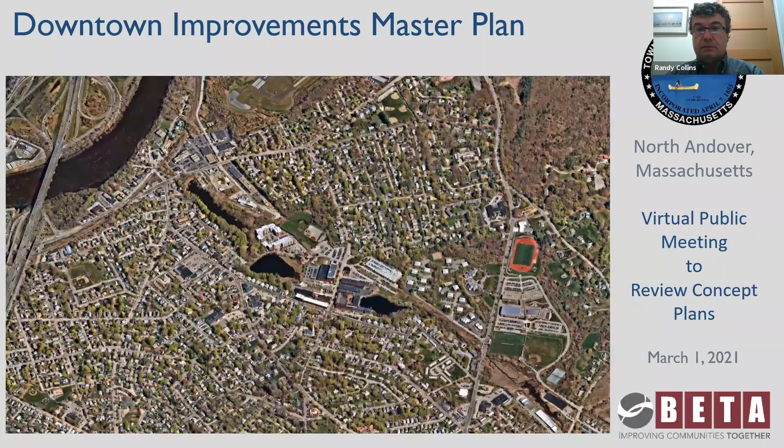So as Gene said, this is the third of the public meetings that we've had for the project. I'd like to go over a few things for tonight. This is being recorded and will be available on the town's project website. The address is on the screen. I'm going to briefly summarize the first two public meetings, and then I'm going to get into a discussion on the preferred concept for the downtown.

As I said, this will include polling questions during the course of the beginning of the presentation. And we'll also give you opportunities to ask questions throughout the presentation using the chat feature.

If you're having any problems with the chat feature, one of the members of the tech team will help you out. Simply just press the chat icon and in the to field, type in tech team and send them a message and they can help you out.

The group, the participants will be muted throughout the presentation. So feel free to make comments that you'd like and we won't hear you. If you want to ask a question, again, use the chat icon for asking those questions.

Jeff's going to moderate the questions as they come in. We probably won't be able to answer every single question, but what Jeff is going to do is look at sort of the trend of the questions and be able to distill them down so that we can answer as wide a variety of questions as possible.

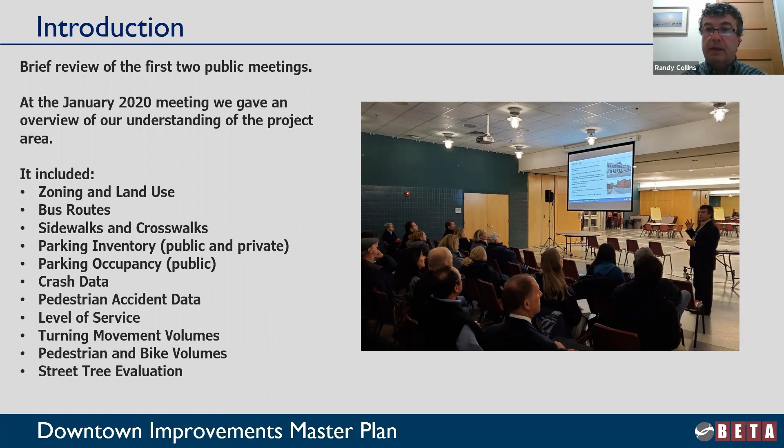The second meeting, back in December, was the first of the virtual meetings. It was a meeting to look at a couple of options that were ideas we generated based on input we received and based on looking at the downtown and coming up with ways to make improvements. One of the things we're trying to accomplish with the project is to generally provide a renewed streetscape for the downtown and also to make better connectivity to the downtown, from the surrounding neighborhoods as well as from the Mills area.

There were two general options presented that focused on the core of the downtown. Parallel parking was one option, angled parking was the other. The way things turned out, people preferred the parallel parking option as opposed to the angled parking option, and that's what we're going to be forwarding through in this presentation.

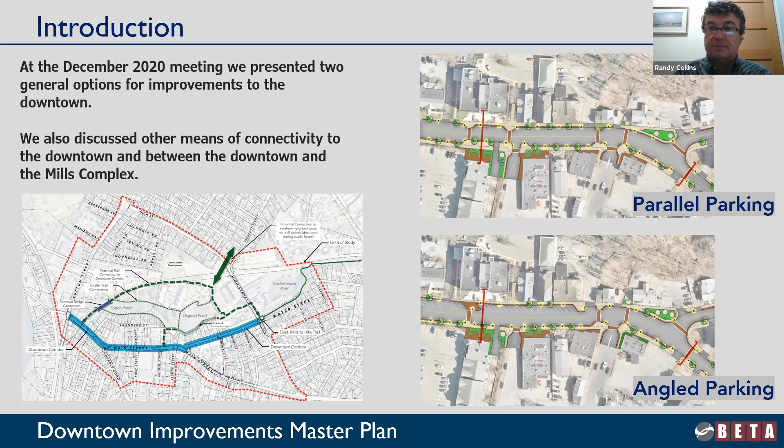So here's our project study area, and here is the concept plan. I'm going to give you an overview of the core area of the downtown. This is the parallel parking concept — basically, when you do an on-street parking count between Waverly and Water, you find there are 54 existing spaces, and this concept results in a loss of 4 spaces, down to 50 spaces. I want to walk you through this in a little more detail as we look at the entire downtown study area.

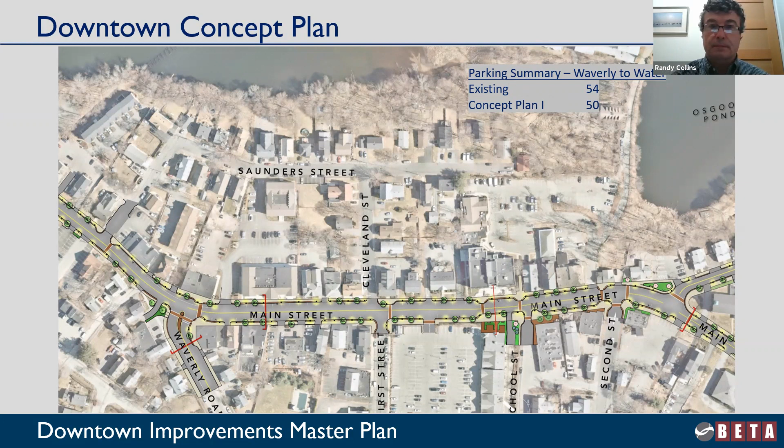So this is right in the core of the downtown at Town Hall. That red line you see going across the roadway is where we're going to show some renderings of what the downtown could look like.

The other thing I want to point out is just a general orientation to the plans, which you can see in the legend. The green circles are generally proposed trees. The yellowish bright areas with a dark spot are ornamental lights. Brick banding was in the sidewalk area, and that's an important point to point out.

We did have some questions at the last meeting about brick sidewalks versus non-brick sidewalks, or having a brick band. It was the preference of the group at that time to have a brick band as opposed to the sidewalks being entirely brick.

There are crosswalks, which you can see on this graphic as well. But the other thing to point out is the existing curb line, shown as a red dashed line. In some areas it's very different from the proposed curb line. So in the area across the street from Town Hall, you can see the red dashed line right at this location showing the existing curb line location.

Take her out—excuse me while we take care of the dog. Sorry about that. Anyways, the beauties of doing virtual public meetings.

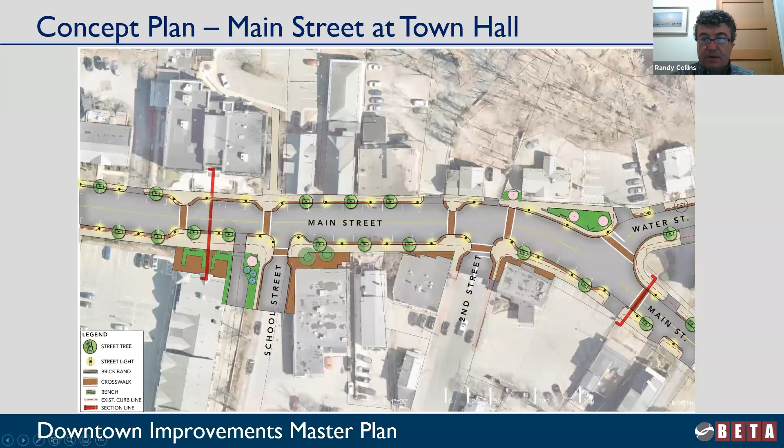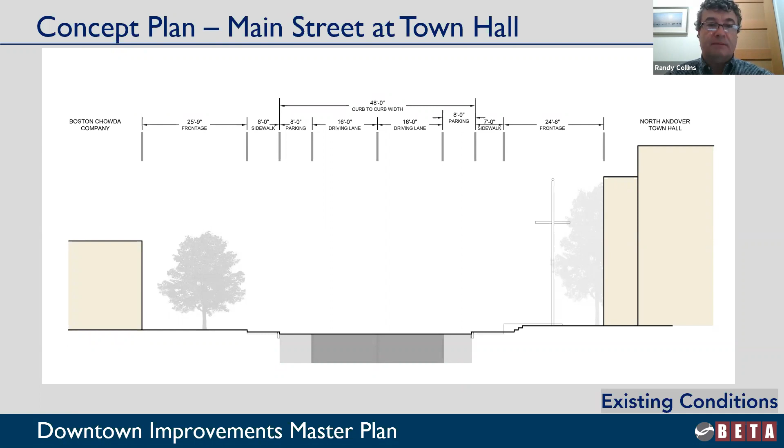This is the cross section of the roadway width in relation to the sidewalk widths currently between Town Hall and Boston Chowda. The roadway width is about 48 feet, with travel lanes about 16 feet and 8-foot parking lanes. Under the proposed condition, at least in this small segment in front of Town Hall, the parallel parking across the street from Town Hall is taken out, and we're able to add into the sidewalk area, making that area about 21 feet with a 7-foot sidewalk, while still maintaining parking on the Town Hall side.

One thing to point out is that the travel lane width goes from 16 feet to 13 feet 6 inches, which for a downtown area is a relatively generous width. This is about the only section of downtown around Town Hall, from about Water heading towards Waverly, where there's a 13-foot-6 travel lane. But the travel lane never gets any narrower than 11 feet, which is a very common travel lane width for downtown areas.

Hey Randy, we have one question come in asking, will the trees be precluded by the utility lines? Well, I'm going to touch on that in just a second.

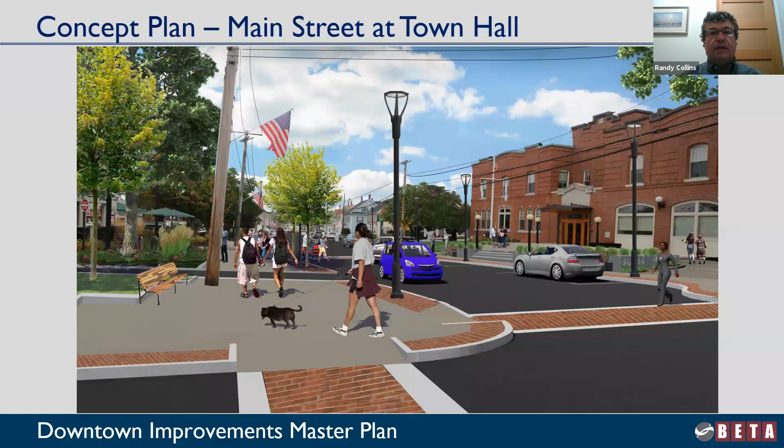I wanted to give you a rendering depicting what we're talking about. This is looking to the north, generally speaking, along Main Street with Town Hall on the right-hand side. Here is the proposed condition. Generally, I would say we would still try to find a way to use street trees even if utilities are there—it just limits the tree selection.

You're going to notice that all of the renderings we'll show tonight depict a with-utility and without-utility condition, and we've always shown the trees within there, whether with utilities or without. They don't really get into whether it's a vase-shaped tree, which you might use with utility lines, versus a more upright or straight central leader tree, which you'd probably lean towards without utilities. So this is an example of what it looks like under the proposed condition.

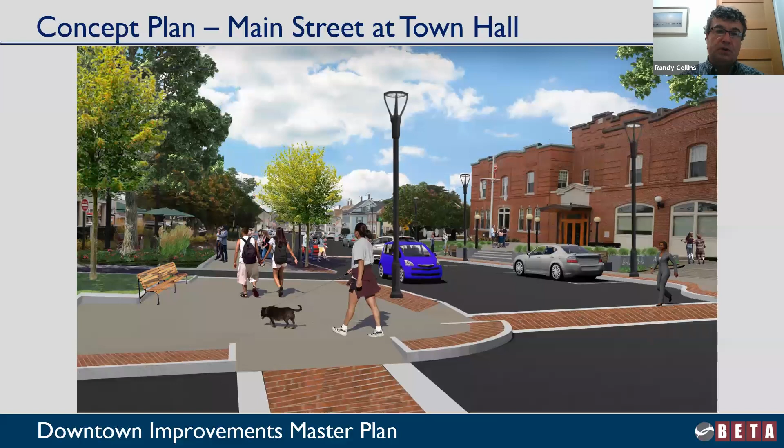And just to give you a reminder, the existing condition, proposed, and proposed without utilities.

Randy, can I ask a couple more questions? Sure. There's one comment and someone says that it looks very good without overhead lines. And the other question is, is there a reason we aren't going to put utilities underground?

There is not a reason. We've been, as part of this process, talking to the town about the utilities, and it's been a subject for all of the public meetings that we've had. I think the way to characterize it currently is that the town is still looking at putting the utilities underground. There's funding issues that go along with it. But anything that we do would be able to, if we build in the right infrastructure, accommodate undergrounding utilities in the future. So what I mean by that is we could put in duct banks and some vaults in the sidewalk during construction of the streetscape that would accommodate the future undergrounding. It's a decision, final decision has yet to be made. And again, this is just a master plan, so we're really talking about preliminary ideas. No matter how the project moves forward, the undergrounding of the utilities needs to walk hand in hand with the streetscape development plans so that the right decisions can be made when it comes time to implement the design.

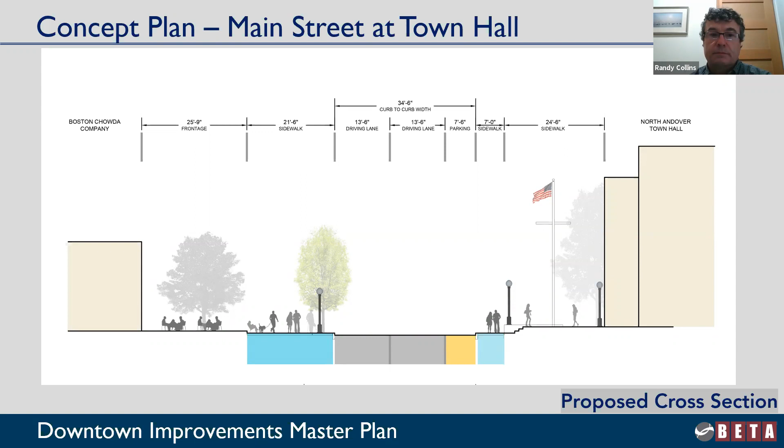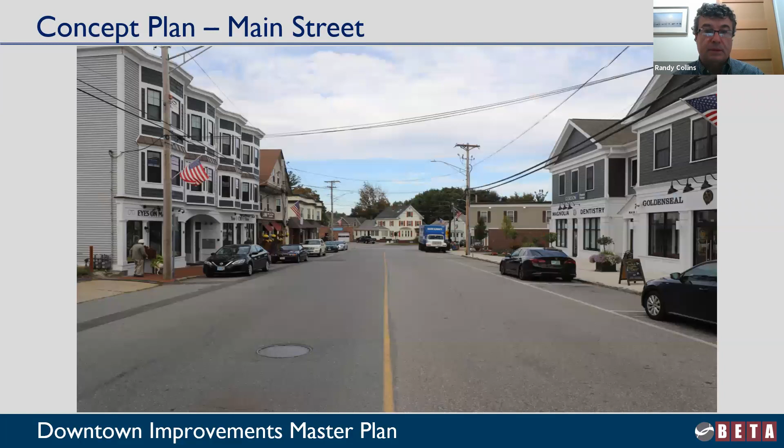This is what it looks like today in front of the Broad Street School redevelopment. Here's what it could look like, without utilities.

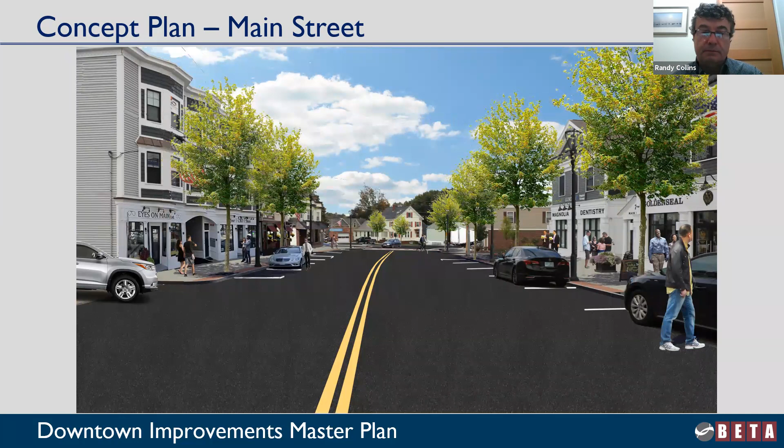Continuing towards Waverly and Main—actually, I'll take a view looking at the Waverly Main intersection. We've got a cross section here, and I want to draw your attention to the red dash delineating the edge of the roadway as it exists today. What we're proposing is to tee the intersection up with Main Street, making it a more conventional intersection. We'll continue to provide parking in the wider curb cut area, and also provide access to the house right below Waverly Street and Main Street.

We're hoping this does a number of things—going back to connectivity and pedestrian improvements, making a safer crosswalk at the Waverly Main Street intersection. Under the proposed plan, we'll maintain the parking mostly as it exists, maybe a little narrower, and maintain access to the house whose driveway currently goes out onto Waverly Street, and will now go out to Main Street. You can also see a couple of neck-downs helping reduce the crossing distance for pedestrians as part of the overall proposed changes to the Main and Waverly intersection.

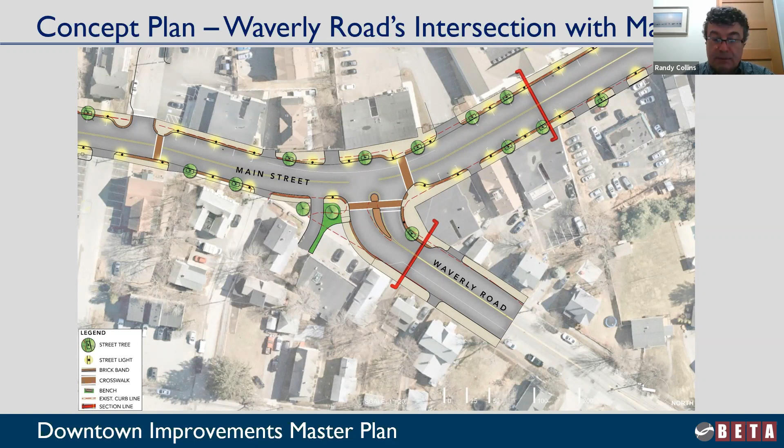The other improvement worth pointing out is the current crosswalk is somewhere near where that red line is that goes across Waverly. By making these proposed improvements, what we're hoping to do is have a more conventional crosswalk, which will in turn make it a much safer crosswalk as well.

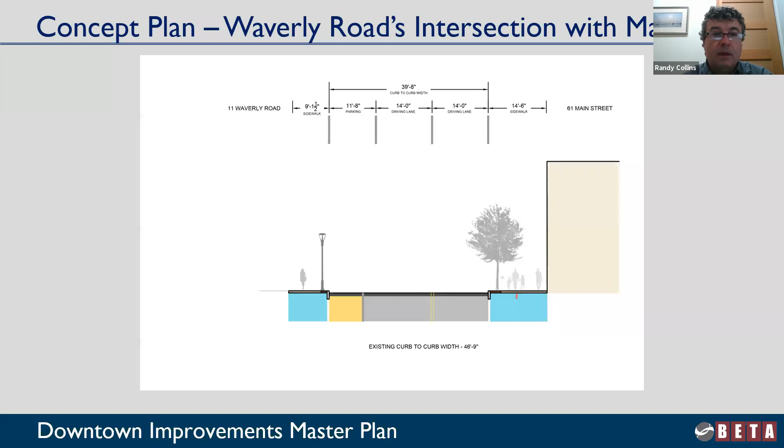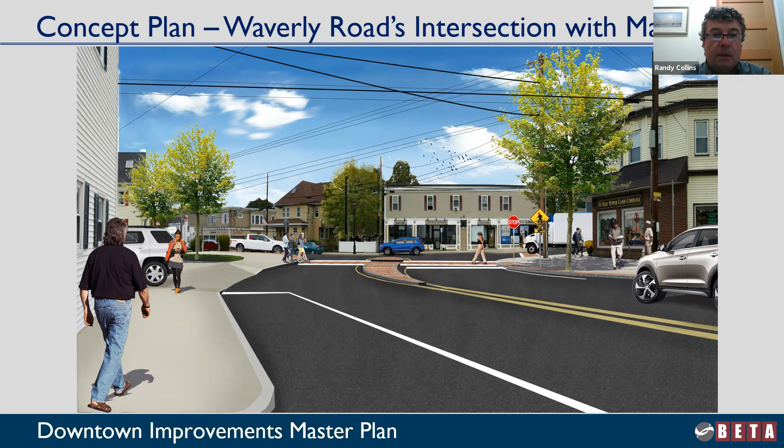So this is the way the cross section works approaching Main Street on Waverly. Here's what it looks like today. Here's what it could look like under the with-utilities scenario. And here's what it could look like under the without-utilities scenario.

Randy, there's a question about how this will work with the improvements from Columbia Gas. The sidewalks and the road on Waverly are scheduled to be repaired this summer. Wouldn't it be more cost effective to do this all at once? Yes, but funding for a streetscape project like this is not secured at this time. So there's a balancing act between being able to utilize the funds from the Columbia Gas folks, but still look forward to the future to make some significant improvements to the downtown roadways and streetscape.

I know that's one of the conversations we'll be having as we come to the final stages of this part of the project, the master planning phase, what the extent is and what kind of funding sources there might be available. But that's part of the consideration as well, to what extent the money from Columbia Gas is used for downtown roadways and sidewalks. Correct me if I missed anything on that, Gene or Andrew.

There was just a follow-up question about timeline and schedule for the improvements. The streetscape improvements? Yes, that's a good question. I would say it's still a little ways off, only because we're at a very preliminary stage at this point. It's really hard to characterize. If there was a big pot of money that came along, it would go much quicker. That's not usually how it works. So I would suggest...

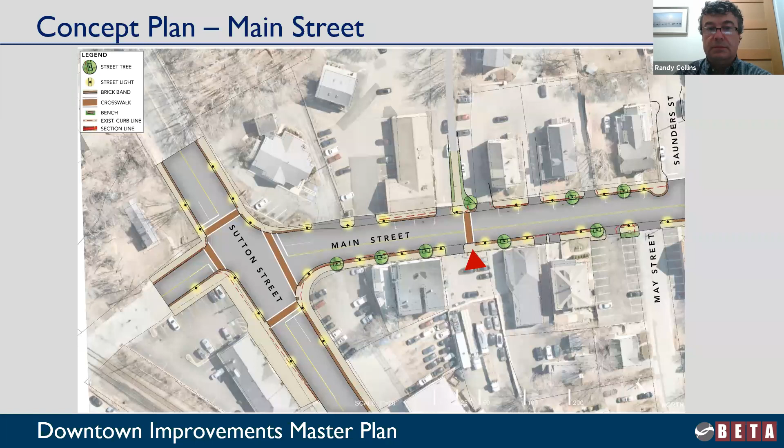So now moving to the other side of Main Street, this would be over towards the Water and Main Street intersection.

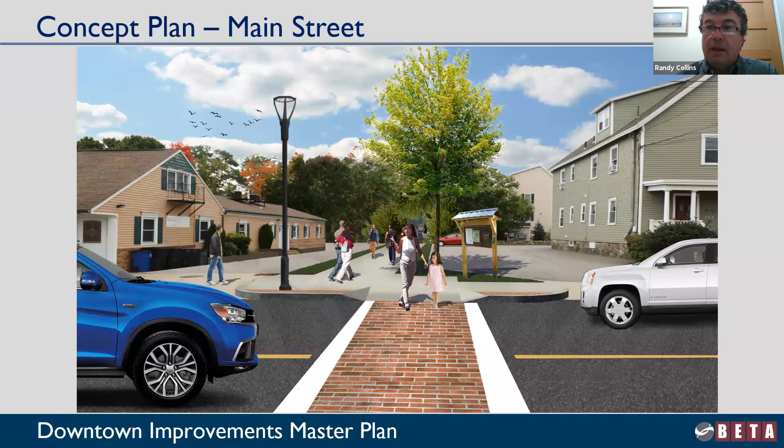Given the width and amount of time pedestrians are within the roadway, one of the ideas is to improve connections between the downtown and the Mills area. So this became a real focal point for making significant pedestrian improvements, not only in the crosswalk, but in the sidewalk areas as well. The roadway travel lane widths throughout these areas will be 11 feet.

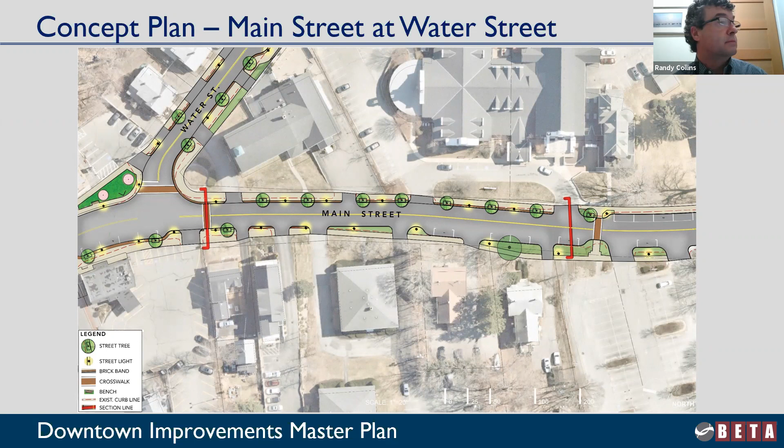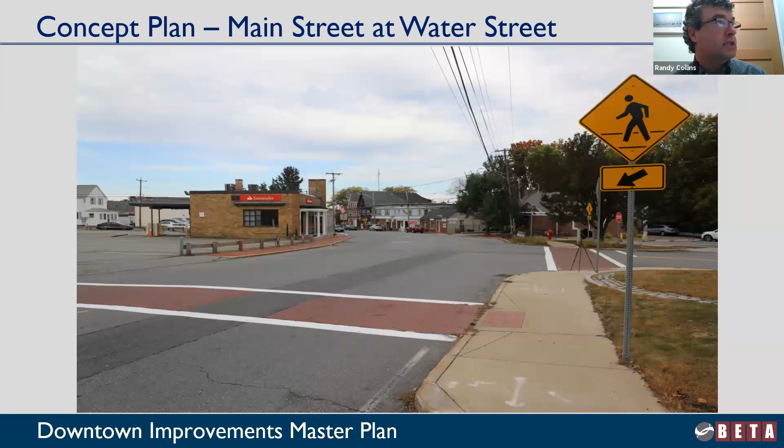So this is what it looks like looking towards the downtown along Main Street, with Water Street to the right. As I go to the proposed image, keep your eyes on the crosswalk sign and the curb line where the crosswalk ends just to the left of it.

You can see we're making some narrowing to the roadway, shortening the crosswalk distance so that it can become much more pedestrian friendly. I'll toggle back and forth for a second on this.

The other thing I want to draw your attention to is the brick banding, the idea of ornamental lights, and introducing more street trees into the streetscape itself. It would also include locations for benches and pocket parks, bike racks, trash receptacles, and wayfinding signage, which I'll touch on towards the end of the presentation.

So again, this is what it looks like currently, under the proposed condition with utilities and without. And Randy, if I could add, this proposes parking spaces in front of Santander Bank as well that currently don't exist, correct? That's correct. Thank you, Jean.

Yeah, so by doing the narrowing, what we're able to do in this particular location is define some parking spaces that don't currently exist.

Randy, there was a question about whether recycling and composting bins, as well as trash receptacles, will be provided. They could, yeah. Quite often it's about at least having trash and recyclable bins together. The idea of including composting bins could definitely be considered as part of the further design of the streetscape features.

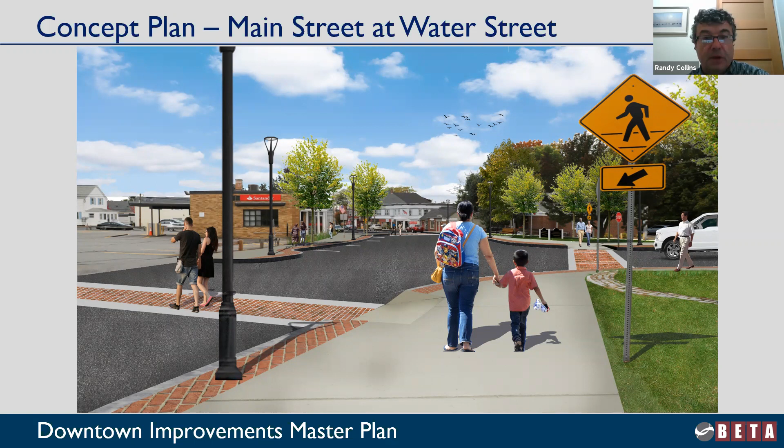Right, and one more, Randy. Have there been issues for pedestrians, or pedestrian crashes or accidents, leading to design proposals? There have. When we did our counts, we did pedestrian counts, bicyclist counts, as well as vehicular counts. And if I'm remembering correctly, there has been an accident in the downtown involving a pedestrian.

So one of the things we're trying to do is make the atmosphere a little more conducive and safer for pedestrians. Yeah, I think we recorded two pedestrian crashes with vehicles, one on Water Street and one between School Street and 2nd Street.

There's a question about the crosswalks, it's great that they're shorter and safer. I'll just add that we're trying to present a kind of gateway and show the character to drivers that this is an area where you really need to slow down. There'll be a lot of pedestrian crossings, so really to change the behavior of the driver, not so much volumes, but to slow traffic down to be safer.

Yeah, if I could quickly add from the town's perspective, I would also look at it from an economic development perspective. I think the goal here is to encourage more pedestrian activity, safe pedestrian activity, which hopefully helps existing businesses benefit from that pedestrian activity. And maybe it'll invite more businesses to invest in the downtown, so hopefully it's an economic development driver as well in the long run.

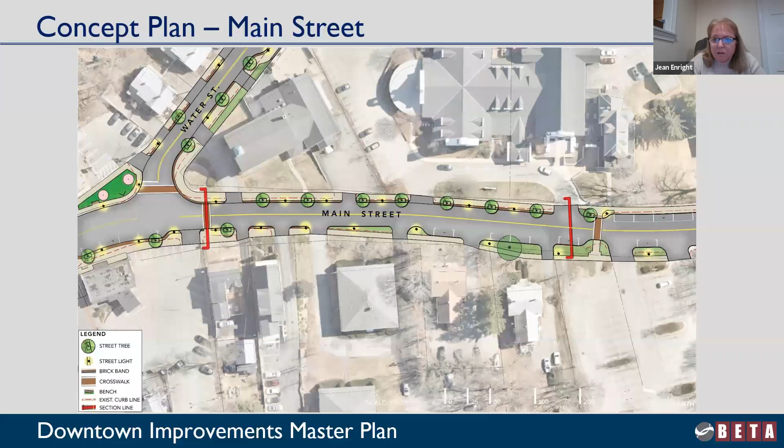Jeff, if I could circle back to the question about pedestrian accidents. At the first public meeting, we heard from many people about trip hazards from the existing brick sidewalks, especially in front of the post office and Dunkin' Donuts, but also across from Town Hall running down toward the Panadosi Insurance Agency. They're really uneven, and people felt they weren't in a safe condition. So in addition to comments made before, it's certainly a safety issue for pedestrians walking on these brick sidewalks.

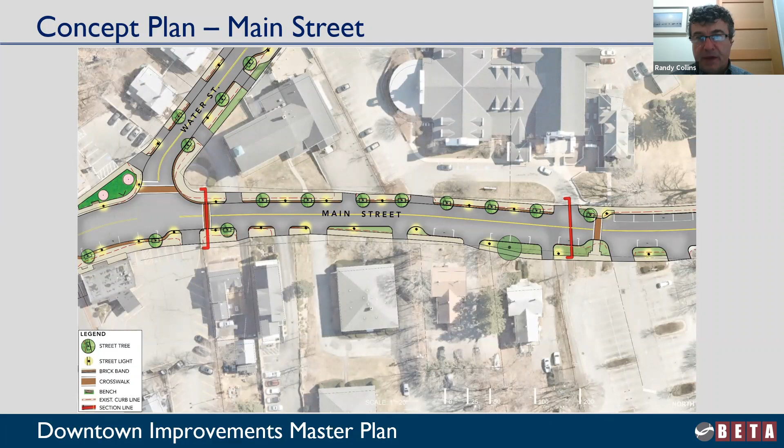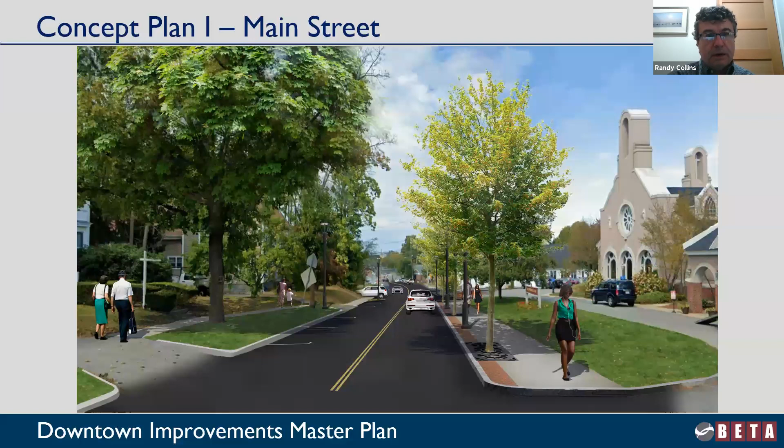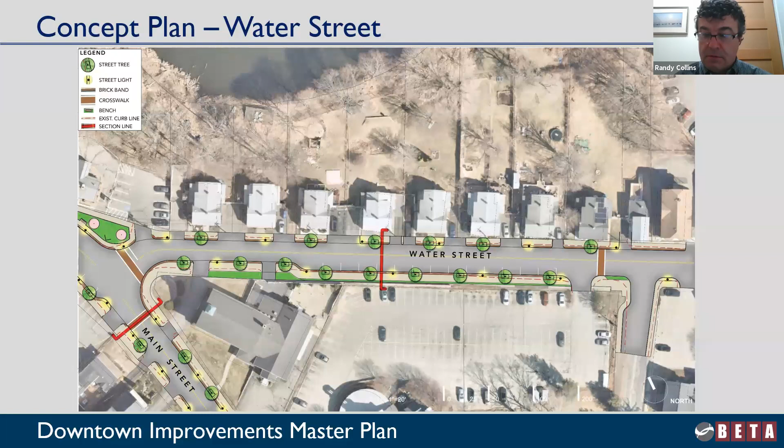The roadway width here is from curb to curb, a little bit bigger than 30 feet. So the existing width is almost 34 feet. And if you remember correctly, the existing width in front of Main Street was about 48 feet. That was a challenge to be able to maintain as many on-street parking spaces as possible, as well as being able to accommodate vehicles and pedestrians. It's even more challenging here.

But I think one of the concepts I'm going to review with you in a few minutes about other opportunities for connectivity might provide an alternative for bicyclists from taking this particular roadway corridor. To answer your question in a less long-winded way, it's a challenge to get exclusive bike lanes in this location. What we're really trying to do is find that balancing act between making sure all users are accommodated.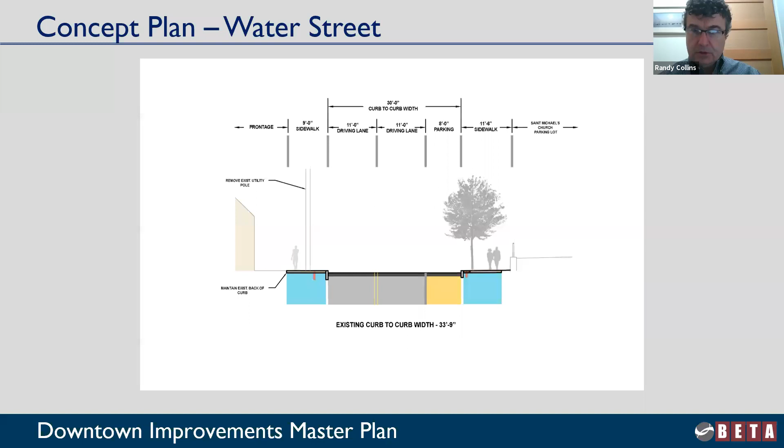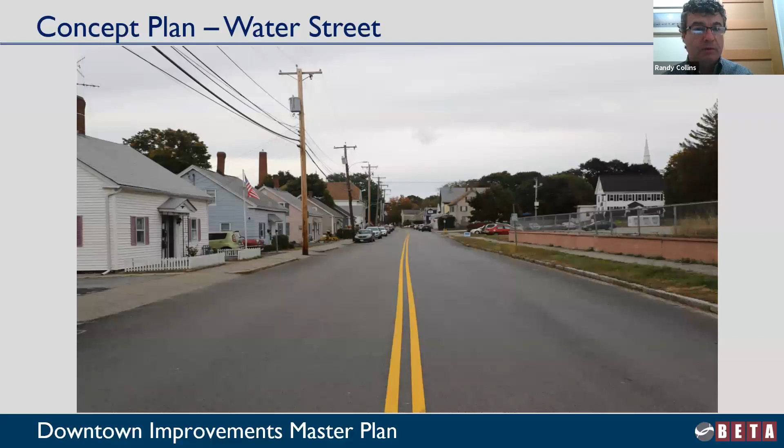So what does it look like? This is what we have today. I had mentioned the unfriendly nature of this part of the downtown or roadway corridor. You have those numerous curb cuts on the other side, a relatively narrow sidewalk on the church side, and in some places you can see that retaining wall, which makes the sidewalk feel even more narrow. You really feel confined, and so what we're trying to do is make this as inviting a space as possible.

So here you can see, I'm going to toggle back and forth and look at the sidewalk in front of the house on the left, or look at the curb line. So there it is as it exists today. Under the proposed conditions, we're widening the sidewalk. Part of that will go to a widened area for pedestrians, but another part will go to streetscape elements such as the brick band, the ornamental lighting, and the street trees to make this much more inviting. We're also able to widen the sidewalk on the other side, the church side as well. Here's what it looks like without utilities. I'm going to toggle through it one more time.

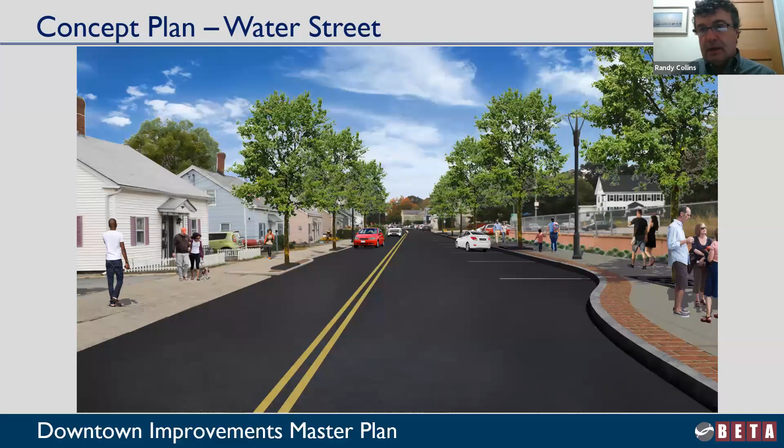So continuing on towards the High Street intersection, again we're bringing all the streetscape features, that character down to this part of the project area, High Street at the Mills. The other thing this concept envisions is changing the intersection from a three-way stop to a four-way stop. One of the things we're looking at is trying to find that balance point between pedestrians and vehicles and really trying to make this as safe an intersection for pedestrians as possible.

The other thing to note, and I'll touch on this again in a few minutes, is not only is this another area of retail and residential living, but there's also the Mills to Hill Trail, which is the sidewalk that runs along the mill in the upper right quadrant of the image and then continues on out to the hills.

We are also making some minor roadway narrowing here, the red dash to the left of the word High Street, but also making some neck downs along the Water Street side of the intersection to shorten the crosswalk distance for pedestrians. You'll notice the same ornamental lights and trees seen elsewhere.

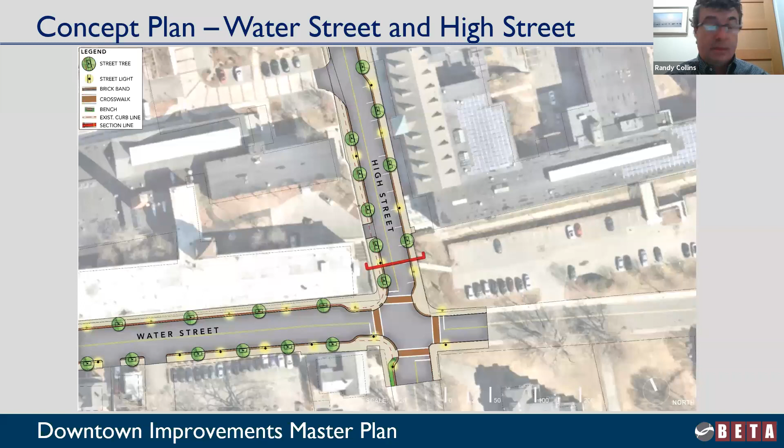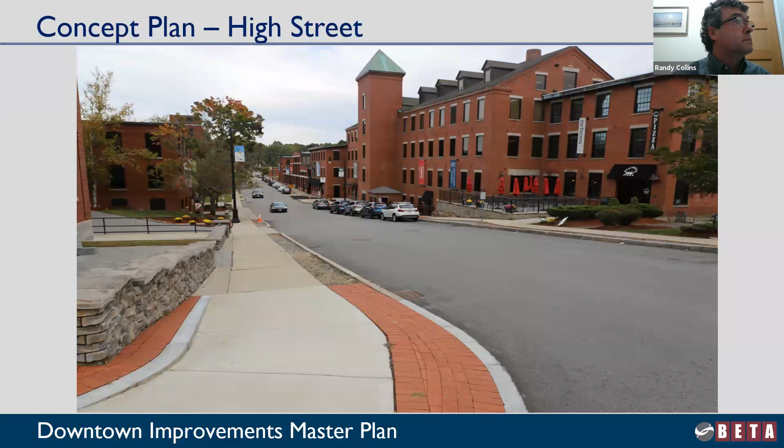Here's what it looks like today, and here's the proposed conditions. I don't have a without-utilities image because there aren't utilities at this particular location, but I'll toggle back and forth between the two. You can see the sidewalk getting a little wider.

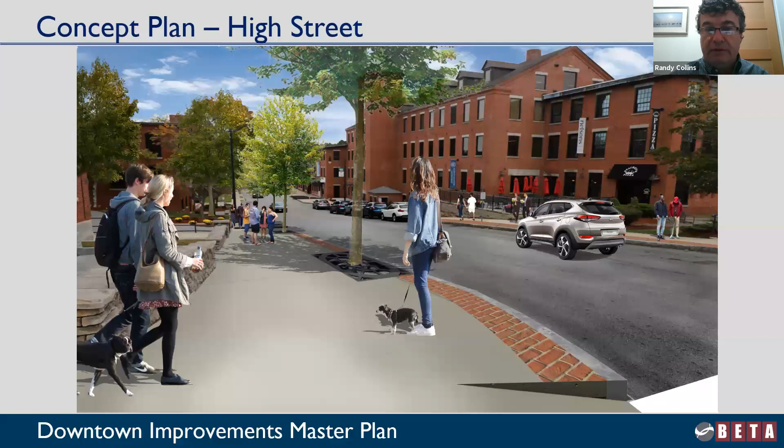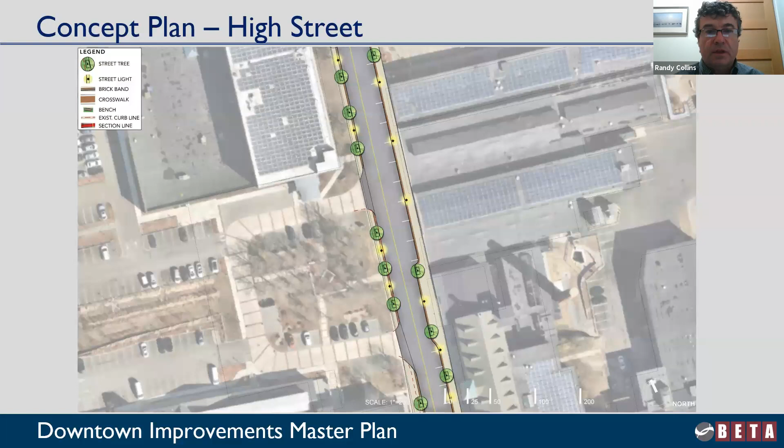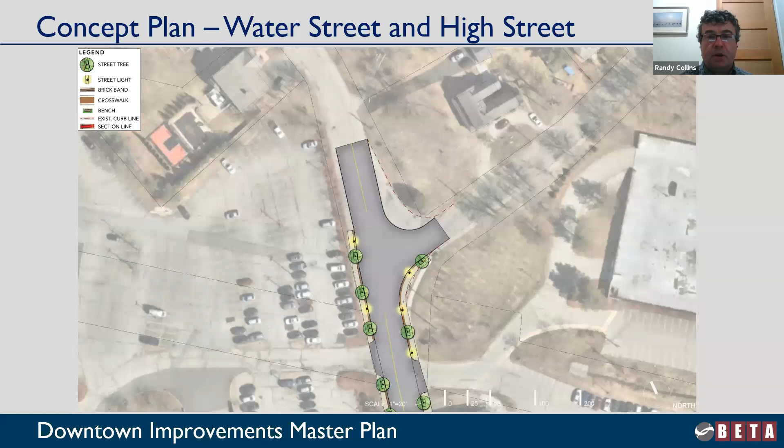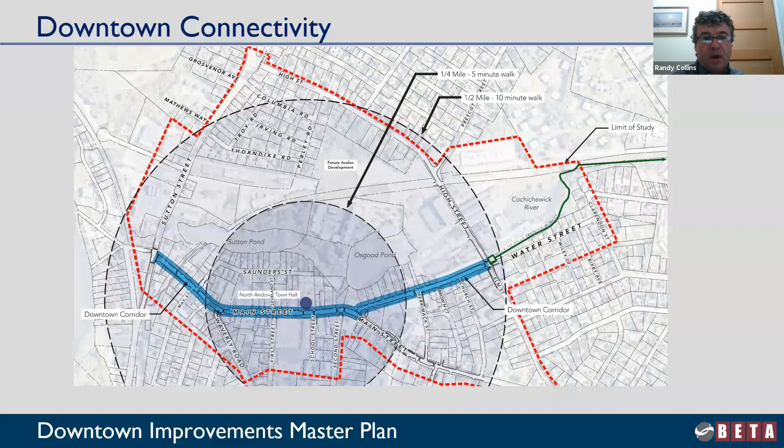One of the other things we've been looking at is not only how to make improvements within the project area, but to make improvements to signage so visitors and people destined for the downtown can get there in a way that's relatively easy and straightforward to find. Coming off of 495, except for the interchange just off to the bottom left of the screen, you have some distance to get from 495 to the downtown. So a wayfinding program is one way to make that easier for people making that journey who may not be familiar with the downtown but are wanting to get there. This is a way to look at the future as well, building upon improvements to the public right-of-way area, hoping there'll be improvements that private folks make that creates a bit of a buzz, drawing more people to the downtown, by giving them a program of signage that gives them a way to get there.

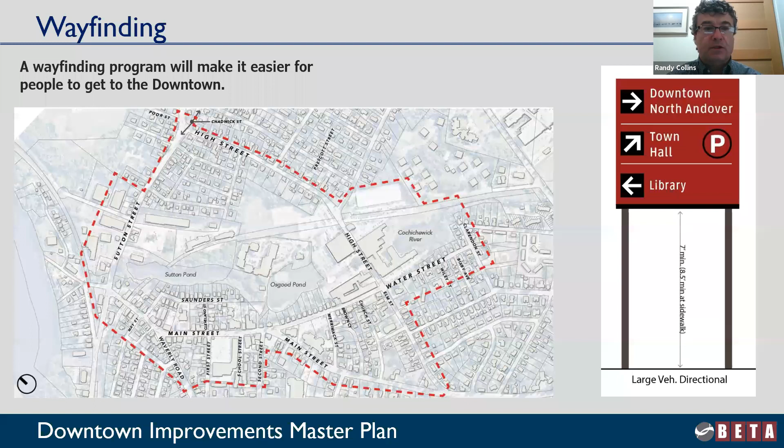So one of the things we've done projects on is wayfinding for communities. This wayfinding concept plan looks at having directional signage for getting you off of 495, but also anticipating people coming from other locations outside the downtown and wanting to make their way there. Having a signage system like this can start to give people, in a very discreet way, not a lot of signs, the ability to not only utilize these wayfinding signs, but because of their distinct character, color, and design type, pick that up and use it as a way to get from point A to point B. Parking, being one of the more important parts of it, is something we really try to play up as well.

So we're drawing to an end, happy to answer any more questions. Let me ask another one, Randy. Going back to the trails, does the town have any ownership or easement for the abandoned rail right-of-way?

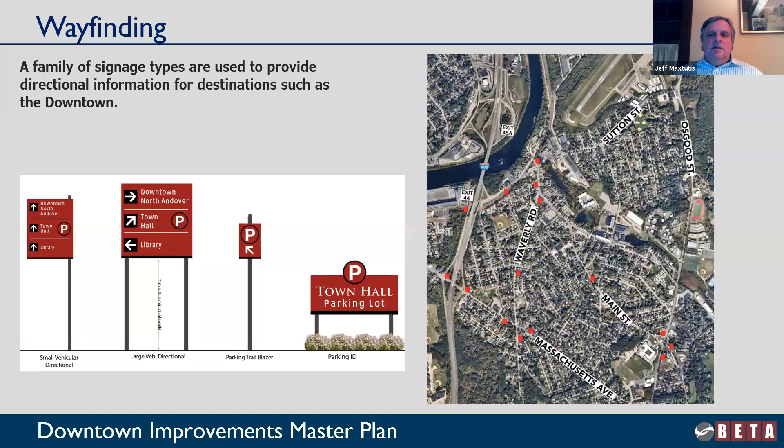I think we've gotten to most of the questions. Some of the statements we didn't respond to directly, but we have everything you've put in the chat or Q&A. We have a record of that, so we'll be reviewing all your comments. If we missed responding to you, don't worry, we'll be looking at the minutes and record of this meeting. Keep in mind this will be on the town's website, so if you know somebody who wasn't attending, go to the town website and take a look. You can also send messages to us there.

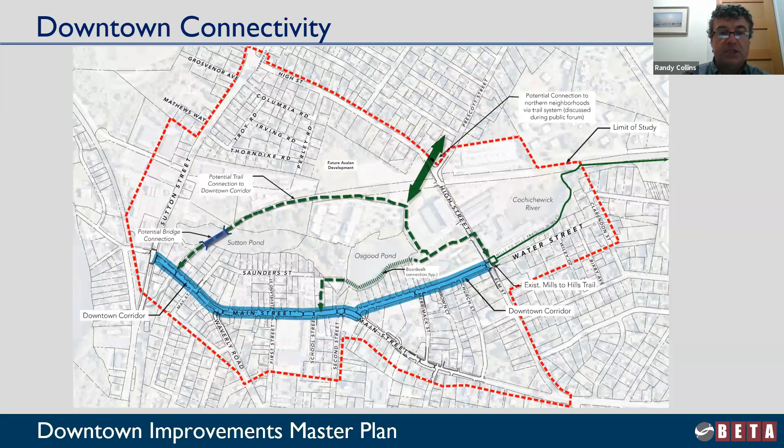I'm going to go to the last slide because I think this is important context for your input. Based on that input, we're going to refine the design plan. We'll be having a meeting with the selectmen at some point, probably sometime in April, yet to be scheduled. We are hoping to complete the master plan by the end of April. That plan will be a summary of the meetings we've had, the input we've received, and a series of recommendations that can be taken to the next step. Those recommendations will also talk about project costs and potential funding, and give some ideas on how you can start to implement the concepts the master plan shows.

One more question, Jeff. Okay, that's what I was going to say. If you could entertain one additional question, I think it's an important one. So another question, Randy, about trees - they like the trees, but wondering about measures to prevent the roots from cracking and creating bumps in the sidewalk.

There are a number of things. The first is the selection of trees, trying to select those that are not naturally aggressive or shallow rooted. That would be the first. Second, oftentimes tree roots stay within the area between the sidewalk and the soil because the soil is so compacted that it's difficult for roots to get into it. There are a number of different approaches that have been used that are relatively new - by new I mean the last 15 to 20 years. It's the soil you propose underneath the sidewalks that helps facilitate the roots getting into that soil instead of finding alternative paths for growth.